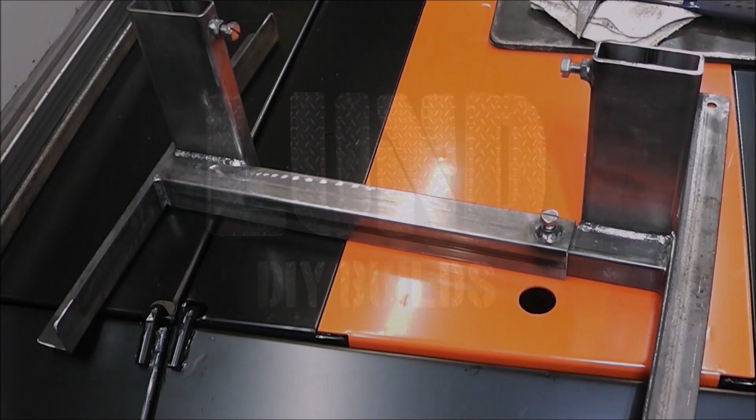What we're going to be talking about today, guys, is order of operations. And for you guys that are doing a little welding and stuff on the side, I'm going to talk to you guys about how to price out your work and how to make a little bit of money and arrive at a price. Now, what this is here is it's a target stand for target practicing.

Piece of wood goes down in this. This set screw tightens up, and there's another set screw here. This is all adjustable. It's not really about what this is. If you want to know how I built this, there's a lot of information on it. It was a flux core welding project.

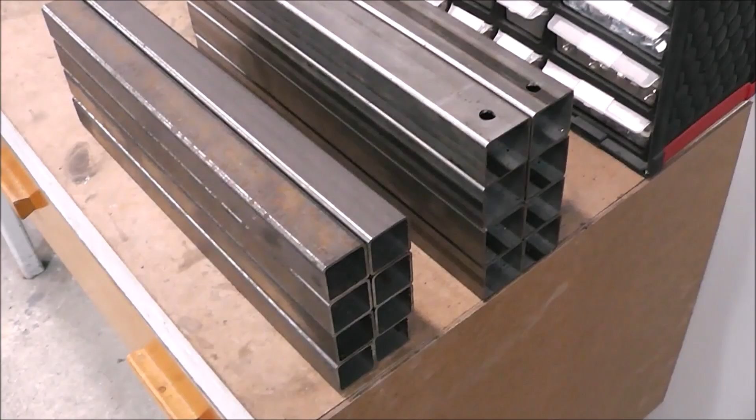And once I'm to that point, then I can confirm everything that I need. And then that goes on to my cut list. As you can see here, I've made enough to build 6 of those target stands. So then what I do is I select one material, let's just say this for example, and I make as many as I need out of that one material.

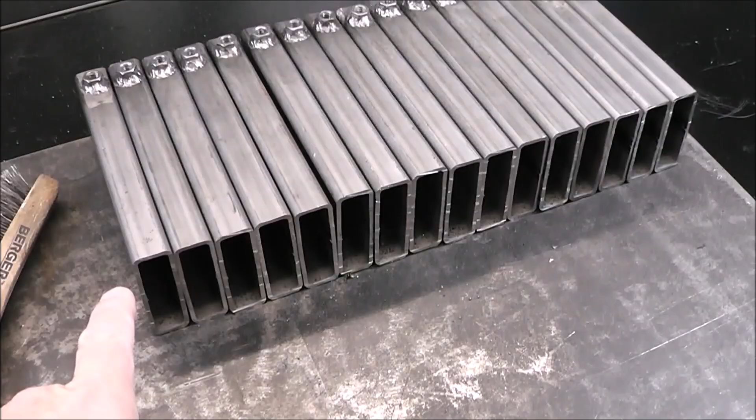Once that's done, I stack it up neatly like I've done here, and then I move on to the next stuff that I need to make multiples, to make duplicates. And then I cut all of these. So once I have all my pieces cut and stacked up the way I need them, then I'm done with the cutting operation and I can put away my cutting tools. Then I move on to the next order of operations.

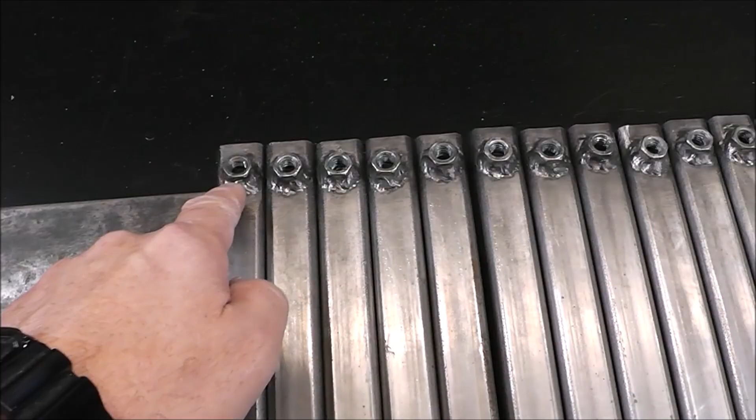For this next order of operations, I chose drilling. They all had to be the same. So I built some stops on my drill press that aligned these individually. Then I just drilled all of these, and I drilled a hole in each of these where a nut gets welded on. So you can see that there's like a consistent theme here. So I go from cutting, and now I've moved on to drilling.

Get everything drilled that I need to get drilled, and then we move on to the next process after that, and that just happens to be welding. So I start with my smaller components, and that means that I needed to weld on nuts onto each of those. So that's what I did, got that completely out of the way.

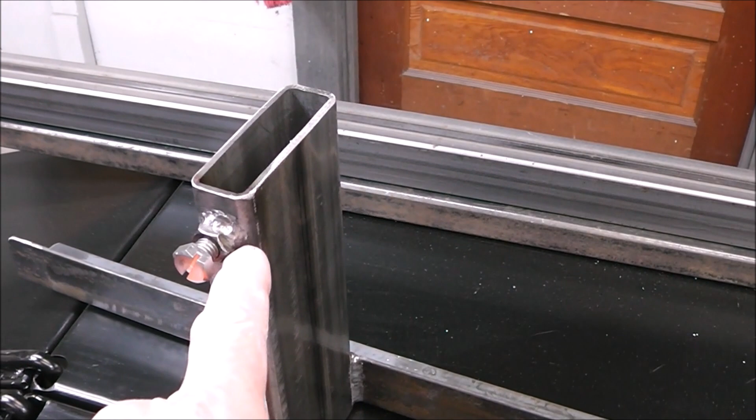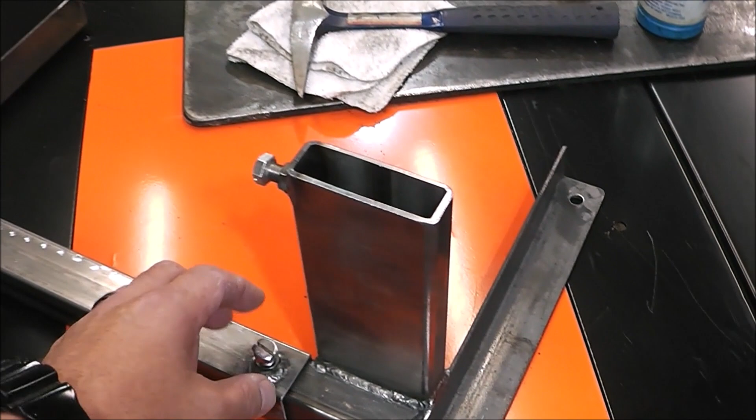And just for reference, that's what these are. This is the nut piece here. Bolt gets threaded into it. That's what we were talking about that clamps the strapping. And with all these nuts welded on, then I would move on to these tubes and weld nuts on all of these. Once I had that part done, then I would break this assembly down into smaller sub-assemblies.

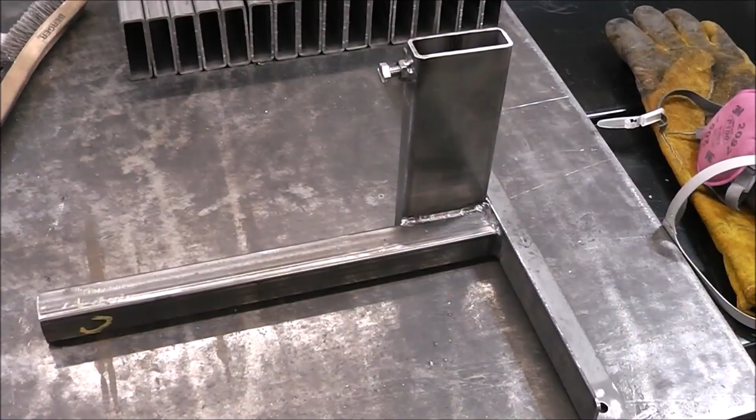So for instance, I would take off this piece here, and I would begin the assembly of this piece, of all these components. I need 6 of these, so I'd be building 6 of these. I'd have the components right in front of me. So we need one of these, we need this size tube, which is the 1¼ inch tube,

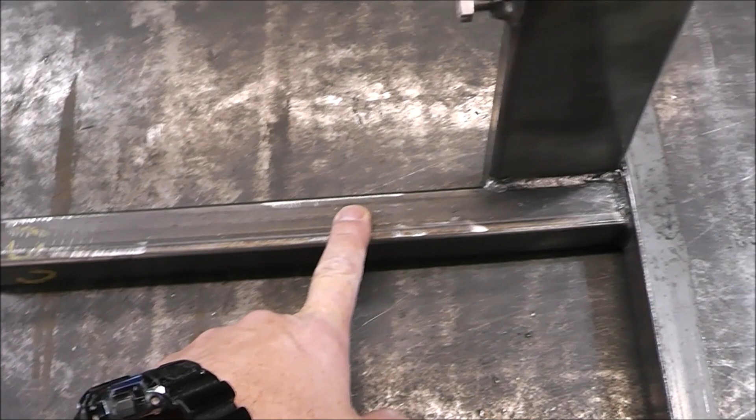and we need one of these angles. I would put 6 of these pieces in front of me and I would just build all of this. And then when it came time to do the other side, I would do just that, then build that side. I know that some of this stuff may sound self-explanatory or foolish, but you know, when you get going on these things, sometimes you just get into a rhythm that you're not really thinking if you're actually being the most productive, but you actually feel productive.

So you build your first one because you have a template, but that's not the best way to build them, just doing one at a time. Make all your cuts, do all your drilling, do all your welding. That's kind of the outline to all of this.

So now that we have down this order of operations, this is where we're going to start calculating what to charge. And again, this is how I do it. I'm sure there's programs and other ways of doing it, but this is what I do: how much does this cost? How much does it cost me? Because if it costs me $31 and I sell them for $32, that doesn't make sense, right? So this is where we begin that process.

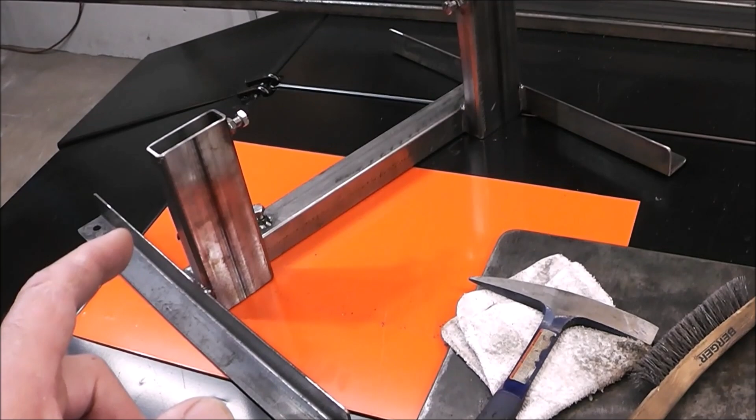So for me, what I do, if I have more than one that I'm building, is when I start my second assembly, because we've already done one, and that was kind of our learning curve. Now we're doing our second one. When I begin assembly on the second one, I start timing myself. How long does it take me to assemble all my pre-cut pieces to fully weld it out? So for our little test, let's say it takes 20 minutes to assemble one of these and fully weld it out. So I've jotted that down here.

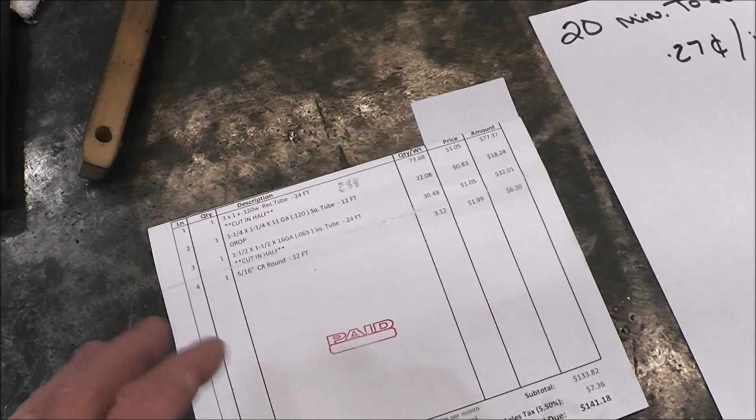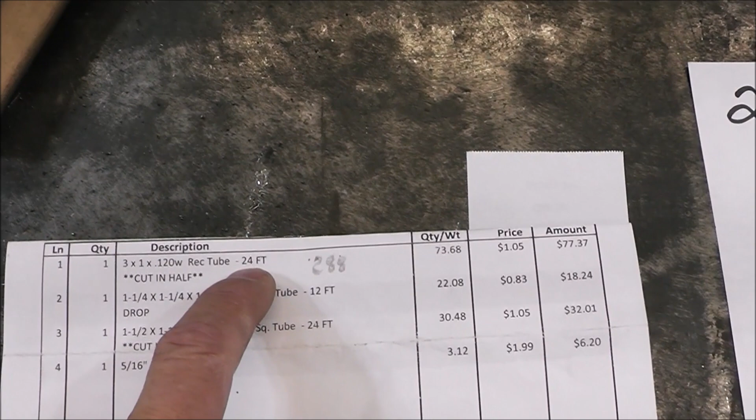Now this is what I do next, because you may not use every inch of your material, or you may only buy a full length and only use half of it. So this is the way I do it. I take my material, which in this case is 3x1 by 120, and that's this right here, just so you're aware. And it says that's 24 feet long. Because I'm in the United States, we use the imperial system, so I convert this number into inches. If you're using the metric system, you can use centimeters, millimeters, whatever works for you. But in our system, it's 288 inches equals 24 feet.

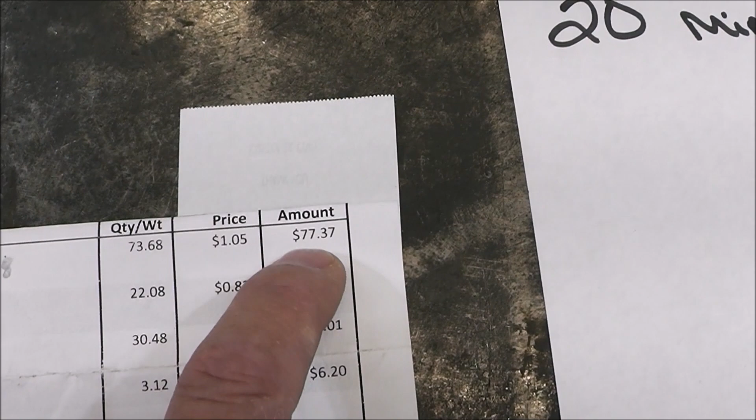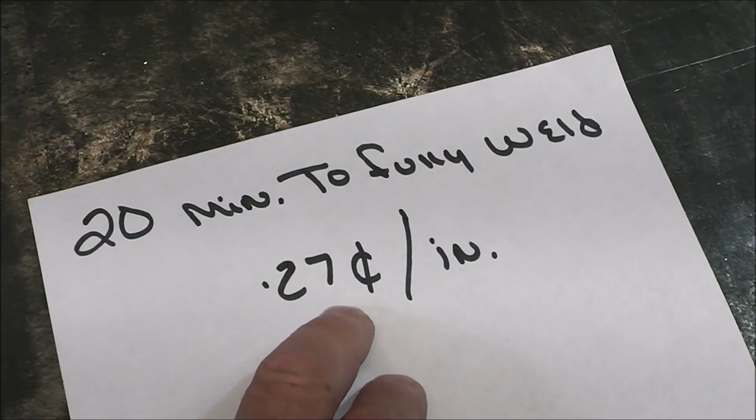I try to determine what my material costs me per inch. So full length of this is 77.37 for 288 inches of it. I just divide that out. Divide the amount by the number of inches, and that gives me what I break even at per inch. So for me, it's 27 cents an inch. So for every inch of this material that you see, it costs me 27 cents.

Each of these legs are 8 inches long, so you've got 8 inches and 8 inches, so 16 inches total for those two legs there. Multiply that times 27 cents an inch. 16 times 27. And that's what your cost is just for that. And then I do it for that material, and then I do it for that material.

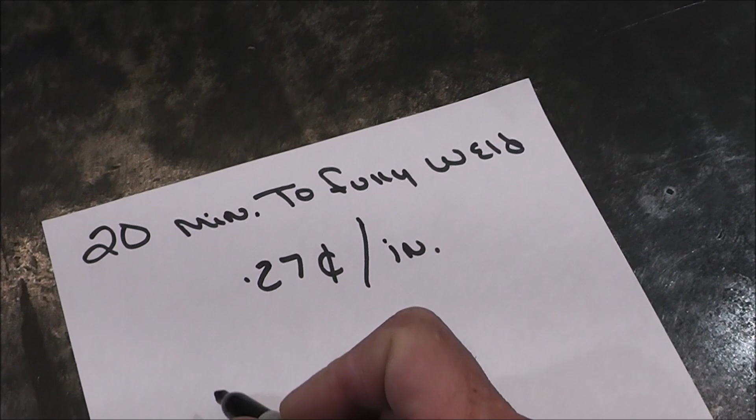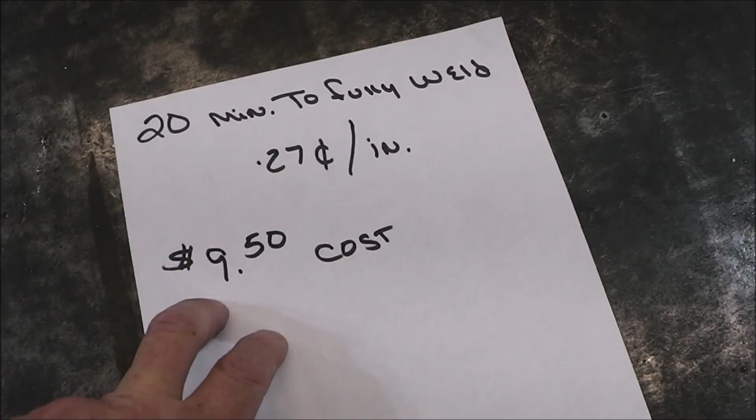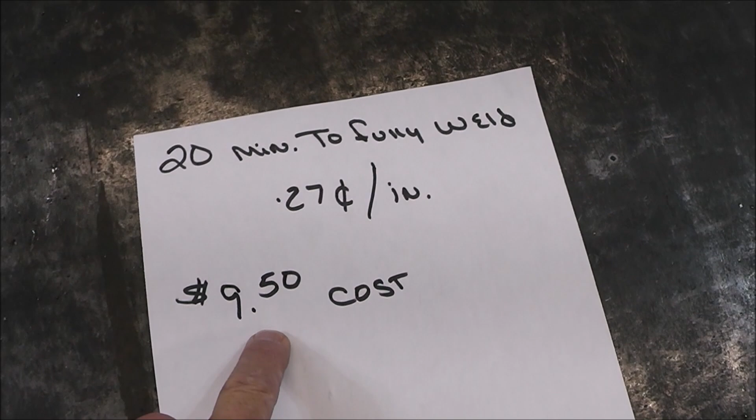And just so we have an example to go by, let's just say we figured out all the inches of our material and our cost, and we came up with a cost of materials of $9.50. Now that's not the actual cost. I don't know what it is. I haven't done the math yet, but I'm just doing this so we have something to look at. So right now we know it takes us 20 minutes to assemble one of them, and it actually costs us $9.50 in material.

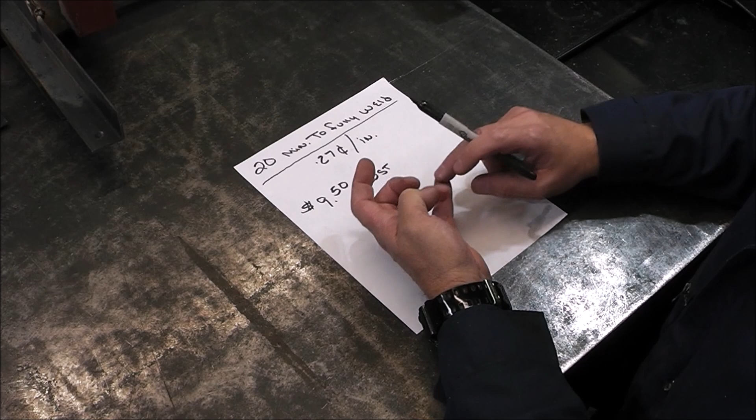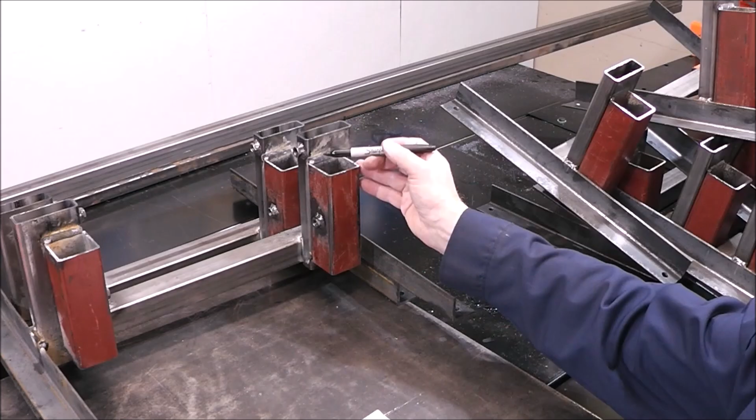And then the next thing is you've got to figure out your consumables, your wire, your electricity, your wear and tear on your blades, and abrasive and cutting discs. Well, for that, again, this is just how I do it. I figure $1 per inch. So if this weld here is 2 inches long, that's $2. Here's another 2 inches of weld. There's $2. So 4 inches of weld, $4. Add up all your welds, and that's how I cover my consumables.

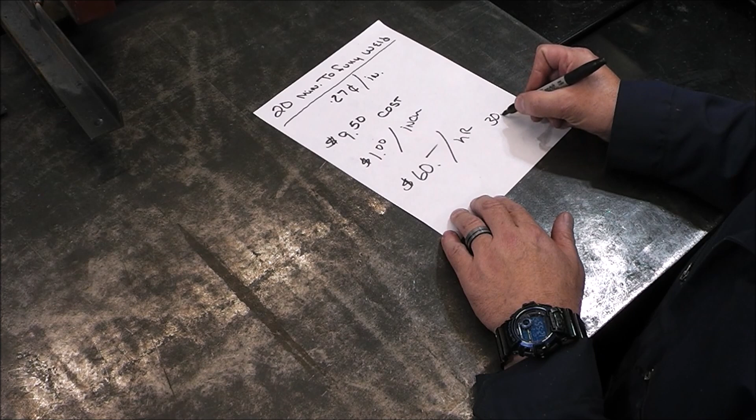Then you just got to come up with a labor cost, what you want to charge for labor. Let's just use a number of $60 an hour. So $60 an hour for labor, about 30 minutes to cut. So you've got 30 minutes there, and you've got 20 minutes up here. So 30 and 20, that's 50 minutes. So I would call it an hour a piece to build these.

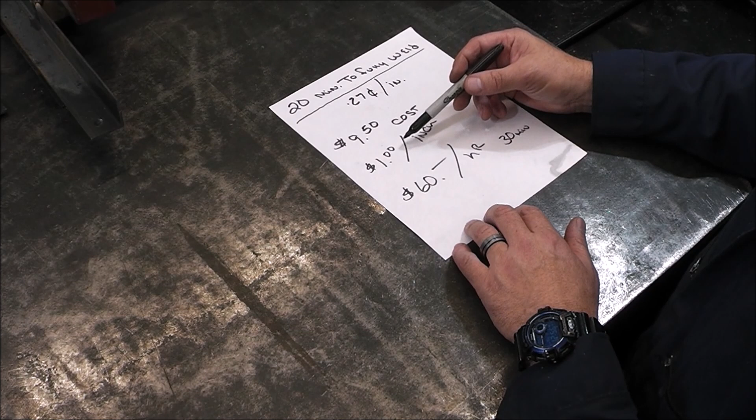So $60 an hour plus $1 an inch for your consumables, which includes your wire, electricity, abrasive discs and blades, plus your actual material cost. And that's how I would arrive at a selling price for these.

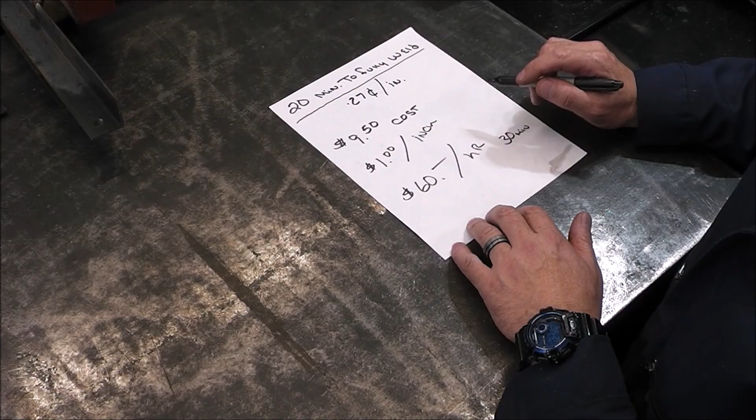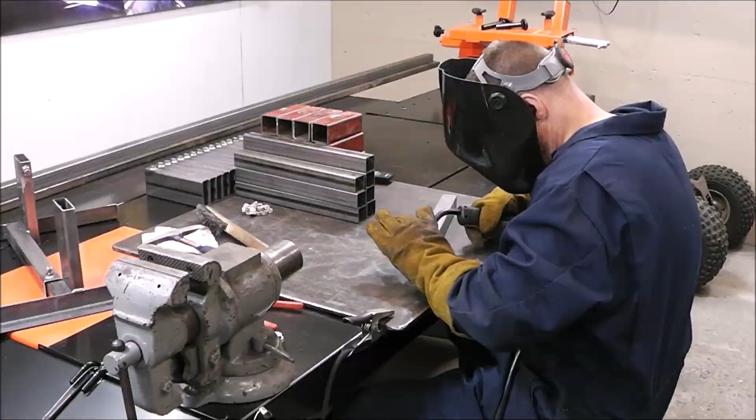It's just not productive for you or me to do one, weld on the nut, then get the grinder back out, and then grind off your paint. You try to keep the order of operations all the same so that you're tooled up one time to do one job, and then you can put that tool away. Plus it helps keep your space organized.

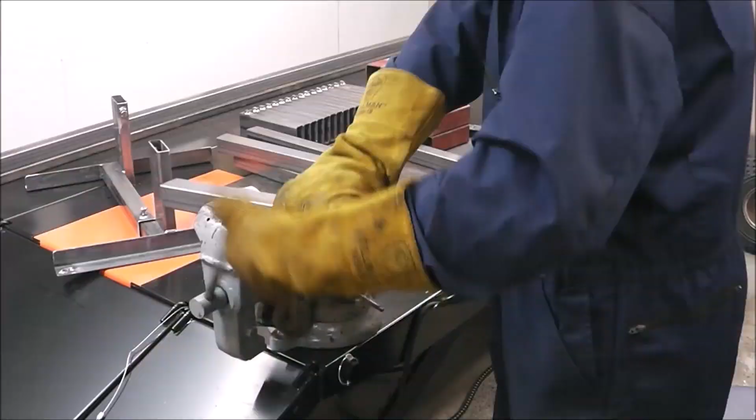Huge for organization. You guys that probably follow me kind of get that gist already. It's just something that's, I guess, born in me. I like order and whatnot. And the reason for doing things this way is efficiency. Bottom line is the more efficient you are and the quicker you get this done, the more money you make. And that's what it's all about, right?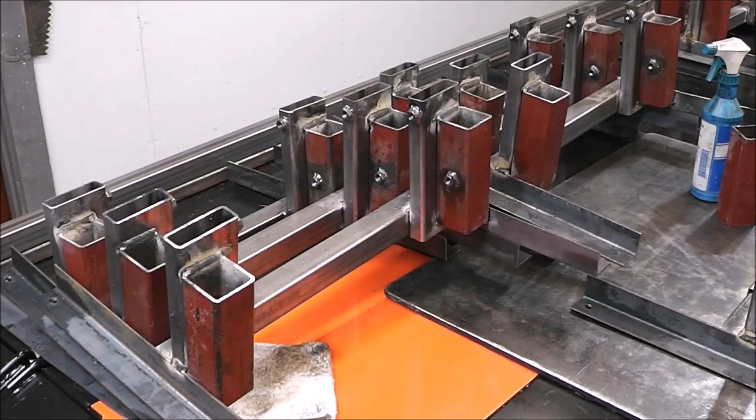So now we fast forward for a little while. We've added some additional orders of operation. And what I've added is a piece of 2x2 metal to this. So now you can put a piece of 1x3 strapping in here, but you can also put what's called a 2x2, which measures 1.5 inches by 1.5 inches, and it has a set screw as well. So now they're just a little more universal.

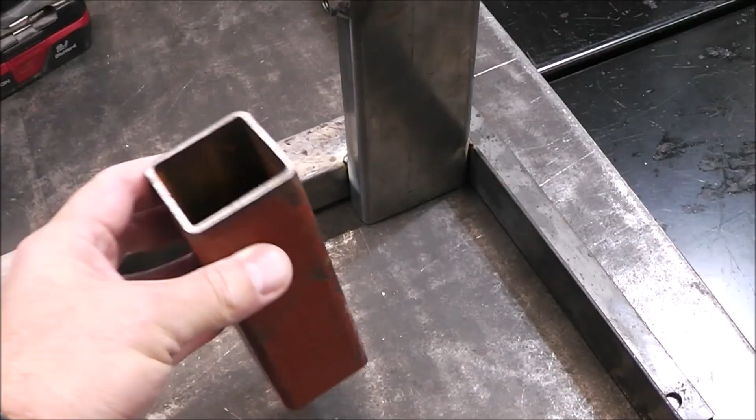The only other thing you could add to this would be a receptacle for a 2x4, but I think that would make it too heavy, and not a lot of people use 2x4s to go target practicing. And that just involves welding this piece of tubing to that. But you can see I'm one short. So I ran short on material and I had this piece that was welded to it. Well, I need to get this piece off of it and grind it smooth. So let me show you what I did.

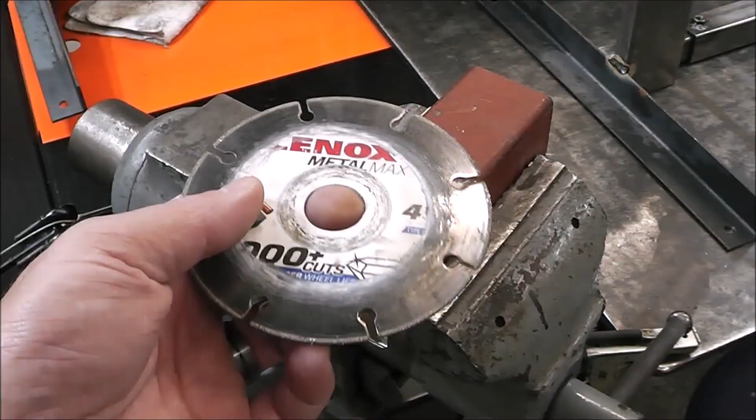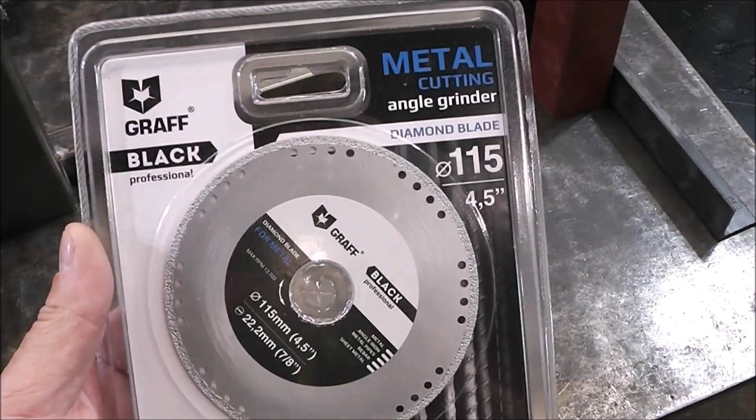Now, I did a review on one of these Lenox discs a while back, and it was my first time using one. If you guys aren't familiar with this, this is a diamond cutting wheel, and it's designed to cut metal. But a lot of you people have said how it's jumpy and it vibrates around when you go to cut. Well, I might have a solution for that. I did a review on this a while back. It's made by a company called Graff Black. And again, this is a diamond blade. Same idea as that Lenox one, and it's considered professional. It's non-directional. So let me show you.

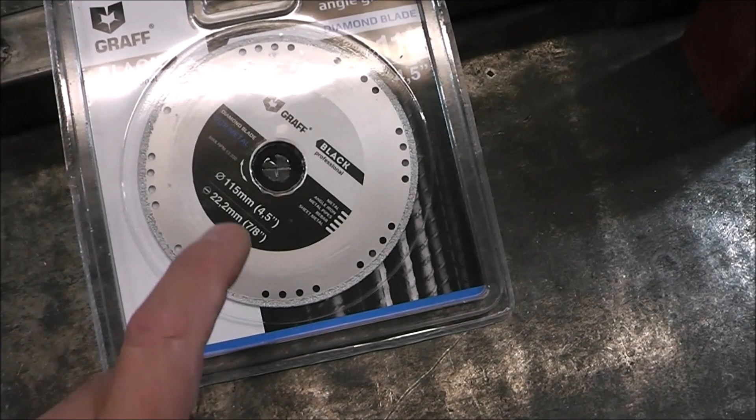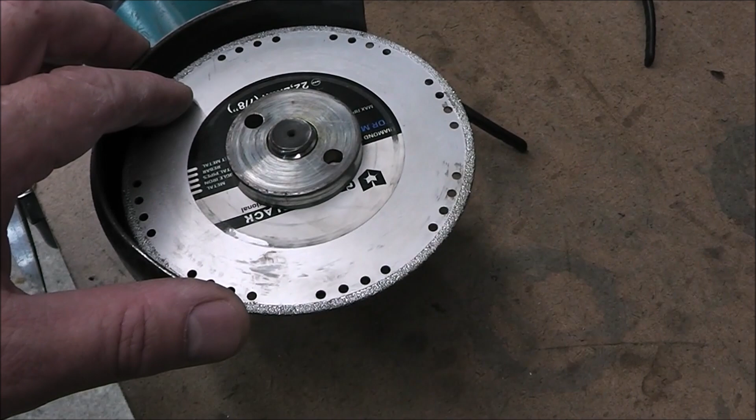I need to cut off this weld. So I mounted up that diamond disc and started cutting it, and it cut through it extremely fast, and it didn't vibrate and bounce around like a lot of you guys have been complaining about. And I think the reason for that is because it's continuous. It's a continuous rim all the way around. So there's no vibration. I think these holes right here, if I had to guess, are probably to help keep the blade cool, because if the blade's not segmented, it's gonna heat up.

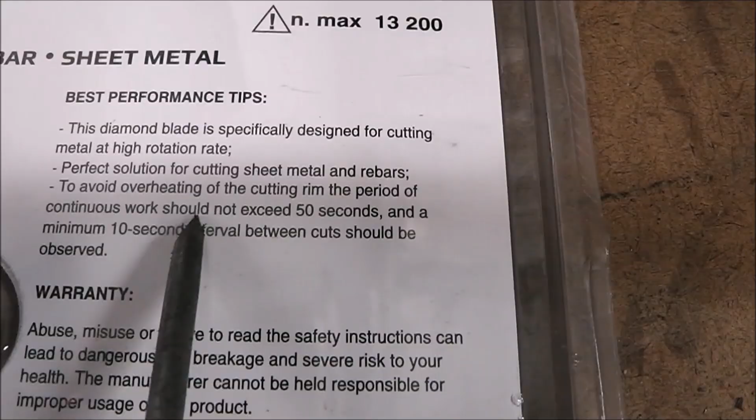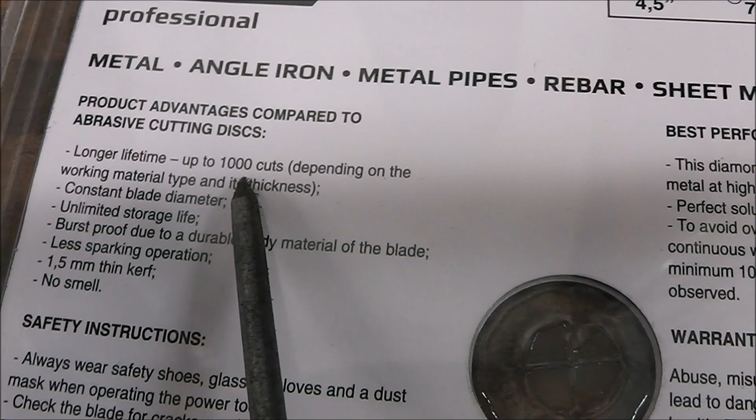And in the directions it says to cut for a little bit and then back it off. These are the performance tips. It says to avoid overheating it, don't exceed 50 seconds of cutting, and then just let it cool down for 10 seconds. So that's pretty reasonable. And it says it's up to 1,000 cuts. So that's pretty good. I think this constant diameter of the blade, though, is going to keep it real smooth. Let me set you up and you can see how fast it cuts. I really like this blade.

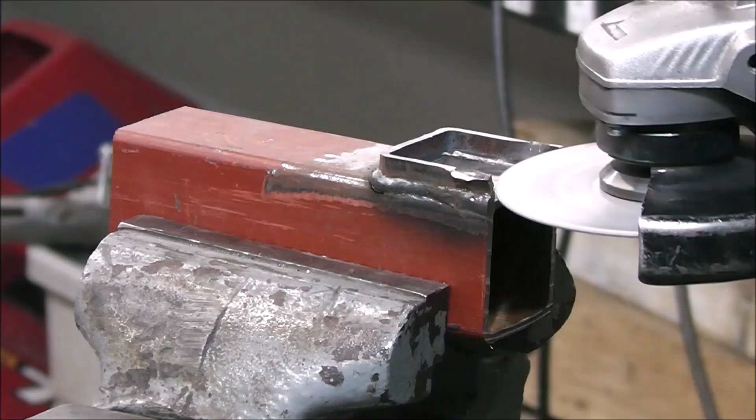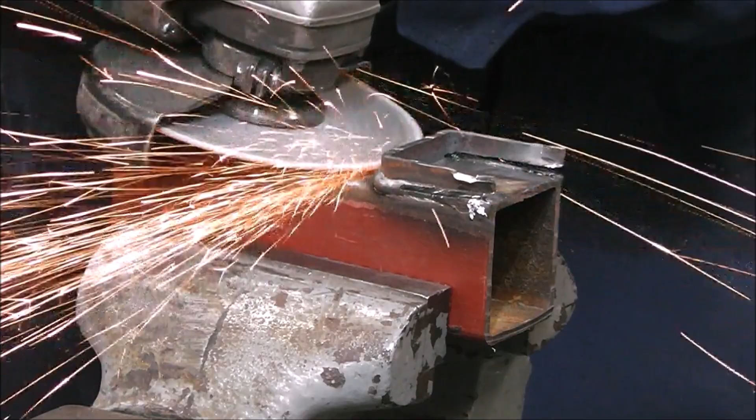Now, as you can see here, all the red tubes that you see in this video are left over from another project. But the one thing that some people will tend to do is give a discount because, well, I've got this material left over, or it didn't cost me anything right now, so you don't charge for it. Don't give your stuff away, guys. You know, this cost you something; at one point in time you purchased this material. So factor it in. This is 2x2 by 1/8 inch tube. So get yourself a price from the metal yard and factor this into your project. Don't give it away just because you happen to have it laying around and you didn't price it out just at this moment.

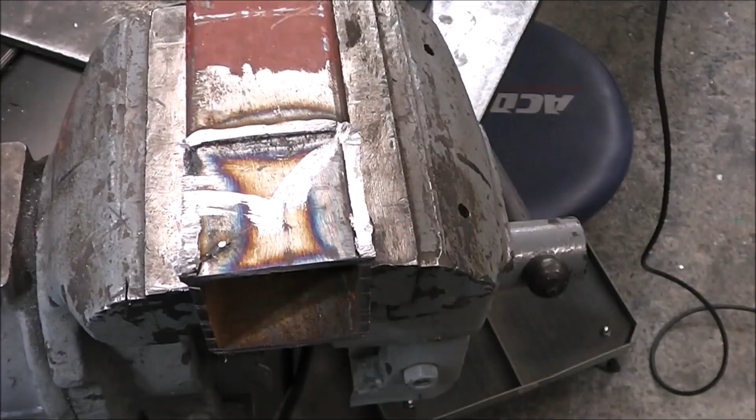Yeah, that's all there is to it. Now I just got to grind this smooth with a regular grinder, and I can use that for this other piece here. But yeah, no chatter whatsoever. So if you guys have issues with the other ones chattering, maybe this is worth giving it a shot. I haven't had it long enough to actually say what the longevity of it is. Yeah, it seems pretty promising right now.

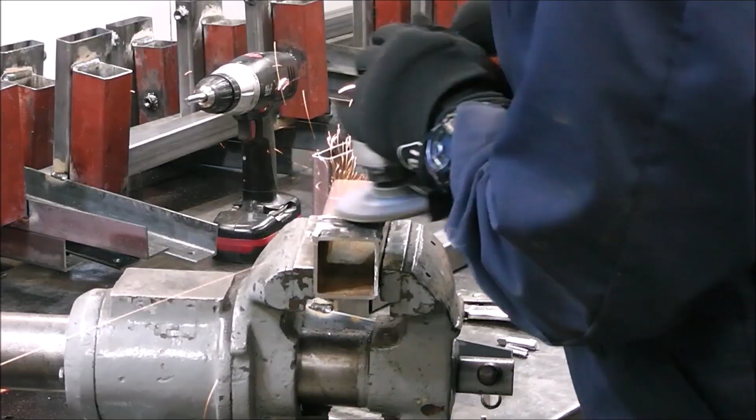So now it's just a matter of cleaning it up, getting it shaped up, and matching into everything else, and you'll never know. Probably hard to hear in the workshop because I got a lot of fans going right now because it's hot, but that's one of the reasons why we're using flux core for this project.

So now that we got the nuts welded on, here's just another order of operations. Once I had all the nuts welded onto all of these pieces that you see in the background, then I went through and cleaned off all the flux from the self-shielded wire, and then I went through and ran a tap down through every one of them. That way you know when you screw in the bolt for your set screw that the threads aren't going to be all bunged up. So we'll do one right now.

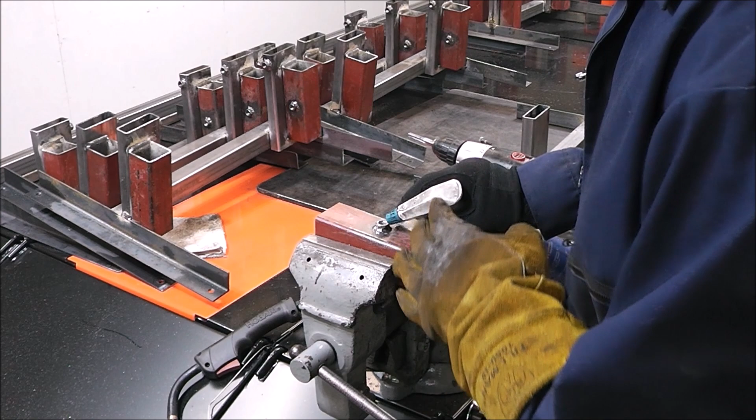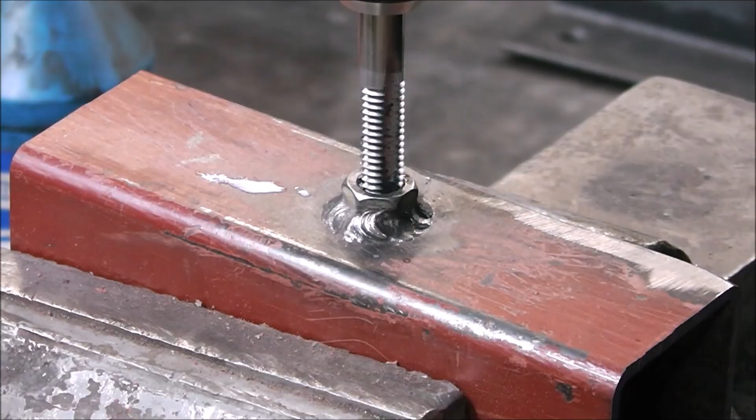You know, again, this is all time that you got to factor in on building this. A little bit of cutting fluid. And to save time, I have it mounted up in a drill. It's just a tap. What I do is run it in and out a few times. And you can see I have it loose in my chuck. That way I'll have a tendency not to break this off.

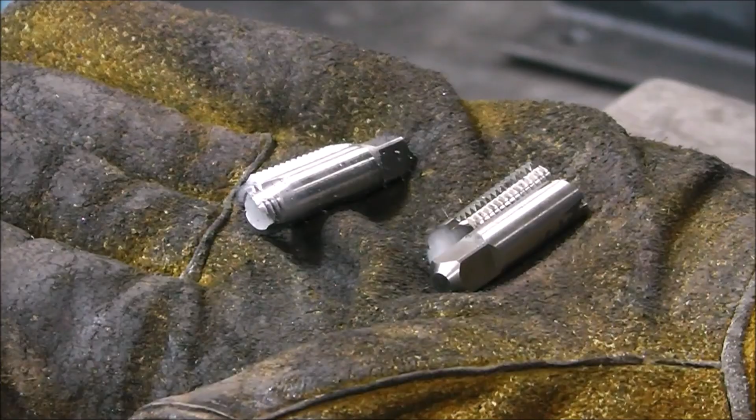So how do I know that having them loose in the chuck helps prevent them from breaking? Because I broke a couple already. So learn from my mistakes. Keep your tap loose in the drill if you're going to do it that way. Just this process alone of putting the tap inside this drill saves a pile of time. And if you're saving time, you're making money. So that's the key when you do these things. Don't cut corners, but try to be efficient.

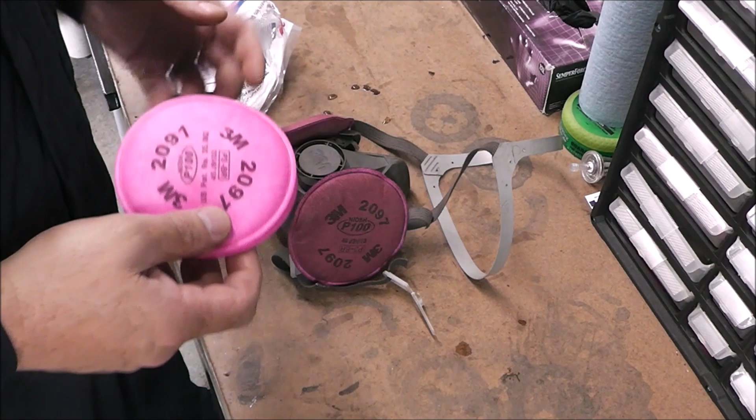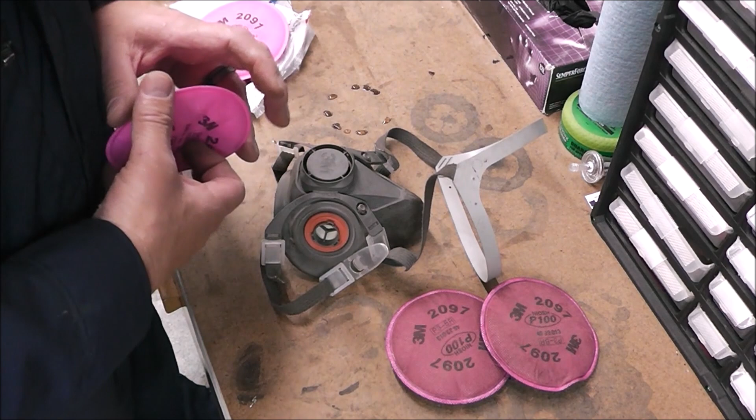Make sure you're wearing a respirator, guys, when you do stuff like this. Look at the difference here. I was actually having a hard time breathing through the respirator, so I figured it's probably time to change them. And they're cheap. And it's good prevention for your lungs, you know. And there we go. So yeah, go from that to that.

Now the key to this is finding ways to speed up production. Not cut costs, but speed up production. Because the faster you can bang these out, the more money you're going to make. Now when I figure $1 an inch per weld to cover consumables, I think that that's a little high, but that covers for sure my costs. The labor cost is the variable. I mean, whatever you charge for your labor rate is what you charge. You know, what is your time worth?

These adjustable target stands are a great beginner welder project. You know, you're not going to want to go out and charge somebody to build them a trailer if you don't really have a whole lot of welding experience. There's a huge pile of liability in that, and you're going to need insurance.

But, you know, for a weekend warrior or DIY person or someone who's just starting out, these adjustable target stands are an excellent project to learn on, because if the weld fails, other than your name or your reputation of having a failed weld, that's the only thing that's going to happen. There's not a whole lot of liability in this if your weld fails. It's not a structural component, so it's more decorative than anything. Don't sell yourself short. Don't give your stuff away.

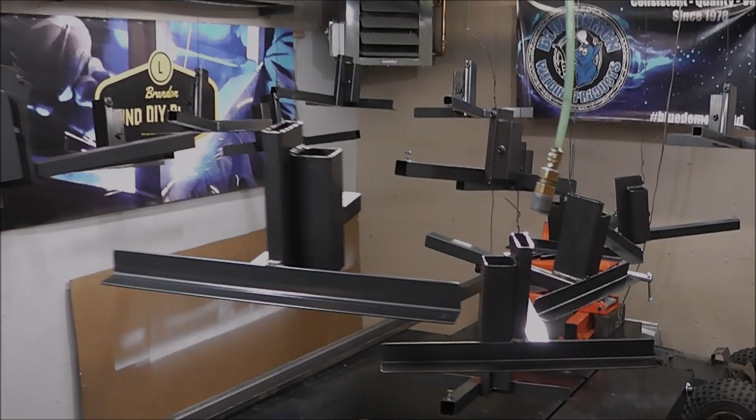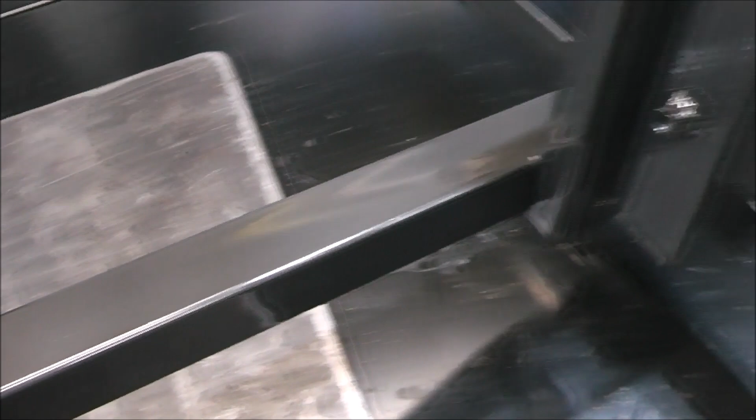Alright guys, I'm not going to just not show you what the finished product looks like. You didn't think I'd do that, did you? So I painted them with Rust-Oleum hammer finish out of a quart can and an HVLP gun. Just a cheap gun. So yeah, you can see what it looks like. Got the hardware in it. Got everything all suspended, hanging and drying. So yeah, they're done. That's what they look like. A few runs here and there, but whatever. They're target stands. Be alright.